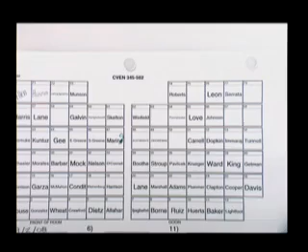You really don't? Okay, well, Ruiz, if you would please, just go fight him for the seat that you signed up for. Why don't you go ahead and move someplace anyway so I can. You're welcome to sit anywhere somebody hasn't already decided they'd like to sit. And your name is? Getman. And you weren't here last week? I was here. I just came in late. David did this. Okay. All right. It's going to be a fun semester, I can already tell. Let me assign. Here we go. Get one.

Well, the only reason I called on Ruiz is because he was yapping his mouth when I was trying to begin class. And so I was going to ask you what the answer to the problem was, but it turned out you were. Never mind. Never mind. All right. What do we got started on? What did I do?

There we go. We got started on an introduction to the class. We got started on tributary loads for, I don't remember. What were the tributary loads for? I'll ask her in the back. That's the new lady. Vitito. No, Vitito. Well, no, you just came, didn't you? So it's not fair just to pick on you just because you're trying to get a date with the guy next to you there. Alan, were you here last time? No, you weren't here either. Hunter, were you here? No. All right. Why did we do tributary loads?

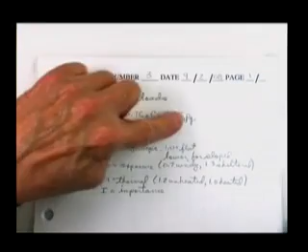Same thing works on page 63. They have an equation for snow loads. Where does the 7/10 come from? $250,000 worth of research, probably up around the north. Let's make them pay for it. We don't have any snow. Times C sub S, C sub E, C sub T, importance, and P on the ground. So you go find out basically in your area, with a map like you saw for the wind, what the basic loading on the ground is. Probably not too hard to research it out. Probably it looks something like this, my guess.

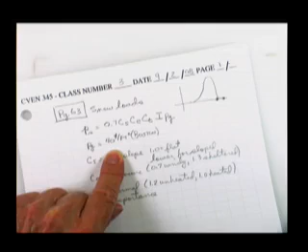Every now and then they do find 80 pounds a square foot in Boston, but not enough to really be able to design for it. So they went ahead and picked 40 pounds a square foot in Boston. And that number's in the book. That's the only reason that I used it. Here, I'm sure it's 0. And then depending on the slope of the roof, if it's flat, it's a 1, and it goes lower as the roof slopes, as you might imagine. The snow slides off.

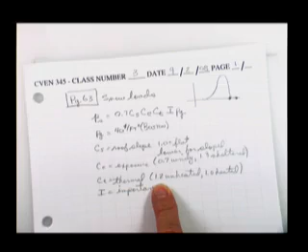An exposure factor. If you're behind a bunch of buildings, then when the wind blows, it probably won't settle on your roof. 7/10 if it's windy, 1.3 if it's sheltered. If there's a heated building, you get a factor, and you don't copy these down. For heaven's sakes, you can, I guess, but it's on page 63. 1.0 if it's heated, so they figure most of the buildings will be heated, and if yours is going to be a warehouse and nobody's going to be in there, they're going to make you bump up your loads by 20%, and then a factor based on importance.

So there's some engineering stuff that we do like that, that feels like you're just pulling numbers out of tables. You understand where they came from, but that's about the best we can do to give you a design for snow load or a wind load. Now, a lot of this stuff in here, in chapter 4 starting, is stuff that, for heaven's sakes, you know how to do. And chapter 3.

And I wouldn't know this except I just finished teaching half you guys statics, and I know that you know how to turn a uniform load, at least I certainly hope so, into an equivalent concentrated load. And for instance, when you see a 345 book that's got this in it, here's how you take a force and break it up into 2 components, I'm thinking that he must think that you haven't had statics yet, because I know you have. So a lot of this stuff I'll just mention very briefly, but we're not going to do a lot of this. We're going to hit this in a hurry.

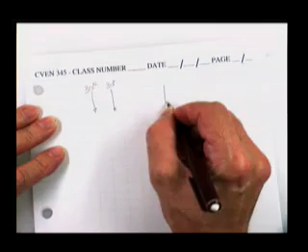If I've got a truck and it's got a 30 kip wheel loading and a 30 kip wheel loading and a 50 kip wheel loading, and these dimensions are 8 feet and 30 feet, I don't think you should have any problem turning that into a single equivalent concentrated load. Now, those loadings would not produce the same bending moment in a beam as would their static equivalent load.

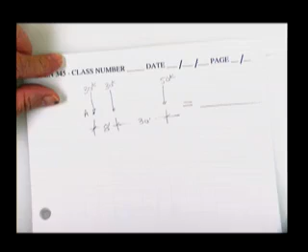But you get this equivalent load, for instance, to solve for reactions. You'll also find out where this load is located, so you can find out where to put these wheels to get the maximum bending moment in a beam. You'll use it for things like that. You call that point A. Those wheels have a tendency to roll about a point of your choice.

And when you get through telling me that all of those could be replaced by a single load, 50, 6, 7, 8, 9, 10, 11, 110 kips, I would insist that the tendency to roll of the original set of wheels about a point of your choice should be the same for your equivalent load as for your original loads.

So you would say that the sum of the moments about A is equal to minus 30 times 0 minus 30 times 8. That's a sign convention of your choice. Most people use a right-hand tendency to roll as a positive number. Minus 50 kips times 38 feet

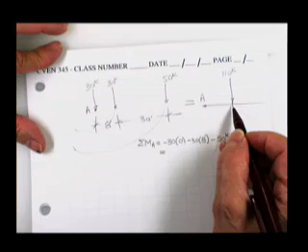has to equal the same when you lie about your loads to make your life easier, or to find out where to put these wheels, or for whatever purpose, should equal minus 110 kips times where you intend to replace the loads as an equivalent concentrated load. And then you solve for X.

And if you're already getting bored, that's good. I'm bored too. That's old stuff.

Resultant of a distributed load. Probably in 210 you learned how to take some weird looking load that nobody had ever seen before. Y is equal to cosine X log of X divided by something, and take it into little bitty slices and find out the height and multiply X times dx and stuff like that.

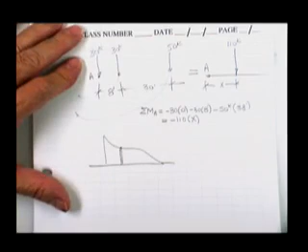The loads that we normally use don't have those kind of looks to them, but it would certainly be necessary for you to be able to take something like that and tell me how much load is underneath it, and tell me where you could replace it with an equivalent concentrated load. If this was 20 kips per foot, and that were 30 kips per foot, and this were 5 feet, 10 feet, 20 feet,

then you should be able to break it down into little pieces that you fully understand. A triangle with a height of 10. You're going to take care of the 20 down here. And where he lives, his centroid. And another area, 20 times 10. And where he lives. And this area and his third point. And you should be able to replace that with a single equivalent concentrated load.

Probably if you're really solving for reactions on a beam, it would not be worthwhile to turn that into an equivalent concentrated load and then put it on the beam to find the reactions. It would make a lot more sense just to go ahead and replace them individually by what they're equivalent to. Here's the first load.

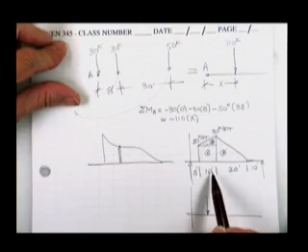It's 20 kips per foot tall and 10 feet wide, so the area under that curve is 200 kips of load. Here's 20 kips per foot high times 10 feet wide. Feet cancels feet, leaves you with kips. It's 200 kips. And from the left-hand reaction, you'd put it where? Let's just pick somebody at random here. Getman.

All right. No, that's okay. Well, now one thing, don't write too much. I don't want you to write none if you need to, but these will be posted. So sketch down enough so you know where I'm at, but I know some students spend all of their processing power getting the figures and the equations and everything right, and then they go home and say, well, what the devil did he say?

So I'm really asking you for this uniform load right here on this beam, where would you put that 200 kips? It's 20 by 10, so that's why we put 200 kips. Where would you put it? It would be 10 feet from the front. That is correct, and the reason he says that is because it's 5 feet to the edge and another 5 feet to the centroid of the shape you're discussing, and so that's 10 feet.

Then this one you broke up into a triangle. You could, if you would rather, break those up into two triangles. In other words, a triangle on the bottom and a triangle on the top. I would not break it up into this shape here because I don't know where the centroid of that is. I can't just go stick it on the beam.

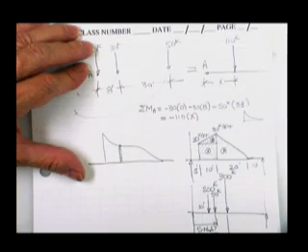Here would be your reaction at A. Here would be your reaction at B. I probably wouldn't even bother showing you that. Goodness, hope you can do that.

Do want to emphasize, once we start drawing shear and moment diagrams, do not draw a shear and moment diagram for this case. This is a total lie. The moments in this case here will be much greater than the moments with this load all nicely spread out. That's why if you ever see somebody walking across a very slender piece of wood and it starts really bending, you'll see them naturally lay down and crawl across the thing. It's easier on the board.

Yes, sir. The bottom half of your... oh, it's off the thing. Thank you, the word is 'hey'. Okay? If you can't see it, just say hey. No sense in raising your hand or anything else. Just, I don't know immediately. Hey, what? Oh yeah, I know what. Put it so you can see it.

All right, so that covers through page 79, page 80.

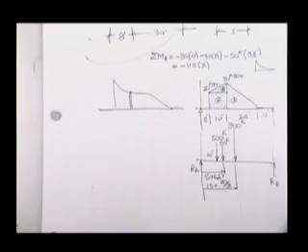Sometimes you will have rather complex distributions. Wind loadings on the sides of buildings, a lot of times they'll have a number, and then they'll have a number, and another number, and it's not linear, it's not parabolic, it's not anything. It's just, you remember these numbers, they came off of the factors with an H on them for the height.

And they just draw straight lines in there, and they just go ahead and assume that probably you could just go ahead and take the average and stick it in the middle. It wouldn't be that far off. If you want to, you could go ahead and break it up into a triangle and put them at the third points, but we probably don't know the numbers that close anyway, and these things are usually pretty close together.

Supports, he shows you all the supports. By now you surely know all the supports, pins, rollers, stuff like that. You probably hadn't had a lot of practice with structures that have pins inside of the structure. So we could fiddle with those and you would probably find something reasonably new.

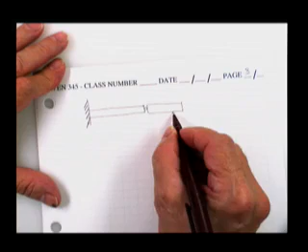Let's say, for example, I had a cantilever beam, and it was pinned to another beam, and that beam had a support underneath it. I'd say you had a triangular load on this beam, 12 feet across, or 12 meters across.

And the load is 100 kilonewtons per meter. The dimension to this is 8 meters and 3 meters, plus a concentrated load on the end of 500 kilonewtons, and a concentrated moment. That concentrated moment probably came from a beam that was sitting like this.

You see it's a wide flange. It actually goes down the road to the next one of these, and there's something sticking out of it that twisted it. Or it could be that at that point on the figure, I've got an electric motor.

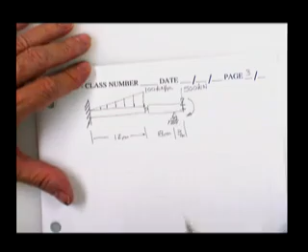Once that motor accelerates, it causes a twisting moment or a torque, and that moment is equal to 1,000 kilonewton meters. And I would like to solve for all the reactions on that structure.

Now that structure is statically determinate, and there are pages that attempt to tell you how to calculate how many reactions there are, if it's statically determinate, unstable, or more highly constrained such that it's called statically indeterminate. The truth is, I think you do just about as well, and make fewer mistakes, rather than counting the number of reactions and special conditions, if you just kind of take it apart in your head.

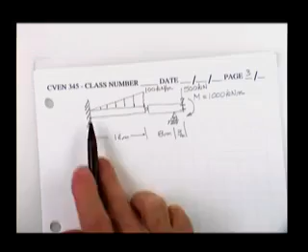This is a cantilever beam. You've seen them forever. Every time something's stuck out of a building and jammed into the bricks, it's a cantilever beam. It has the ability to resist that kind of a load, that kind of a load, and that kind of a load. It's just like a diving board.

And if you take the whole structure apart, you've seen something that's stuck out of the wall like that, and it stands up just fine. It doesn't have a tendency to go anywhere.

Now then, to that, I'm going to bring in a piece of steel, BCD. And if you just let it sit in the air like that, with only one support, you know what would happen. The same thing would happen with this pencil. Every time you do it, it's not stable.

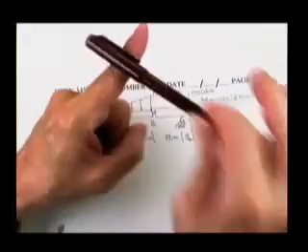It falls off. So what we'll do is pin it to something that is already stable, and we proved it's stable, and then that ought to sit still. It's just like a beam with a reaction at B and a reaction at C.

And you could add as many more of those as you want, and sometimes they do - sometimes there are several of them in a row. Yes, sir, at the end of that second beam. All right, do you mean this thing?

It's like a wide flange. They look like this. They're used to carry loads from this piece of paper to the piece of paper that's behind this one, about 20 meters away. And then every 20 meters there's another one of these things stuck out of the wall, and they connect them together so that you can walk on the top of them. In other words, the floor would go on top of this. So you're saying that goes into - this goes into the board. That's correct.

All right, how do you solve such a problem? Thoughts? You can start by calculating the concentrated load for that triangular load. You could - in other words, before we go very far, you're going to have to replace the uniform load with an equivalent concentrated load. Otherwise, when you sum moments, you're going to have every grain of sand times its own personal moment arm, and you're going to be here for years. So I agree, take it apart is what I was thinking for first.

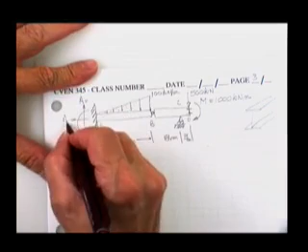And actually, everything that you said is right, has to all be done. First thing I think of is draw free bodies. And as you draw these free bodies, replacing these loads with equivalent loads makes a lot of sense. So the first thing is, this is a vertical, this is a horizontal, this is the moment about point A. Point B, I won't show you any forces because they're inside this structure. And then I would show you a reaction at C - it would be a vertical reaction only, no horizontal reaction, because it's a roller, which can't provide a horizontal force. And I'd look at it and see if I could solve for it directly right now, immediately.

1, 2, 3 - we have 4 unknowns. We have how many equations of statics? You have 3 equations of statics. So you're destined not to get an answer for all of them. Every now and then you can kind of cheat and one of the answers will come out, but even though you get it, you've used up one of your equations to solve for one unknown, and you still have more unknowns than you have equations. So probably the smart thing to do is go ahead and start breaking it up.

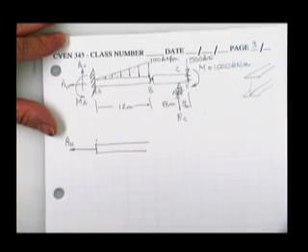First off, I'm not going to show the wall, because that was a little bit of cheating to call this a free body with a wall on there, but I did show you the forces. I'd show you a horizontal, which I do not guarantee the direction - I have no idea, but I have to put an arrowhead on it, and I have to put a name on it so I can put it in the equations. I get students who say, well, why didn't you draw a free body? I didn't know which way to put the forces because I thought they might be wrong, and then I would have a wrong answer. It's not going to happen.

If you guess this arrowhead wrong, your equations will say minus - that'll tell you the arrowhead goes on the other end. Then you have an A vertical - this is a guessed direction. And then you have a moment at A, and this is also a guessed direction. And then here we have a pin. In general, a pin can provide a horizontal force, and it can provide a vertical force.

I'm going to assume that the vertical force goes down on this member AB, and I'll call it B vertical. And I'll assume this goes to the right, B horizontal.

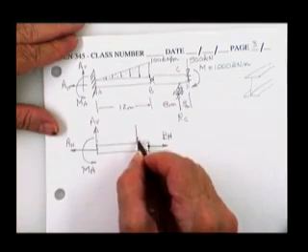Again, to make my life easy, I'll follow the suggestion that I replace all of those bags of sand with a single concentrated load at the centroid of the figure. You'll notice I picked a better dimension on this one, 12 meters. That means this is 8 meters and 4 meters. The amount of load is 100 times 12, that's 1,200. Half of it's missing, 600 kilonewtons worth of sand.

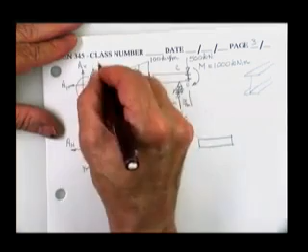Then we draw a free body for the other piece. Incidentally, by drawing this free body, you just added 3 equations to your set of equations. Sadly, you also added 2 unknowns that weren't on the first free body. Let's call this free body number 1. Let's call this free body number 2.

Let me assure you, if you don't number the free bodies, and if you don't write down, hey, boss, I'm using free body 8, equation number 13 is this — if you don't do it in a logical order like that, he'll have no way of checking your work.

All I can do when I give you a problem like this on an exam, if you don't show me which equation you're using and which free body you're using, I just look in the box. If the answer is right, I say great — I love those, they're easy to grade. And if it's wrong, it is wrong. That's a binary situation: yes, no, minus nothing, minus 20.

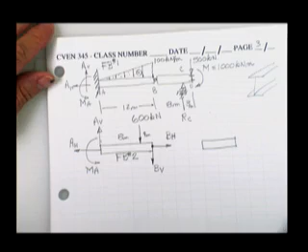When you come in and say, look at this, I have 4 pages of work, I only have 1 mistake — yeah, but it's too late now. Tell me what you did.

B horizontal is assumed to pull on member AB. Which way must I show it on the other member? The other way? Well, I'm not sure I understand.

I'm going to do that, but then I need an explanation for it from you. When you drew another free body here, now you're telling me the arrowheads should oppose. In other words, if this one's shown to the right, guessed to the right on this, then the guess is to the left on this. But when you showed this one up, when you redrew the free body, you still showed it up. So I don't understand — here's two free bodies, up and up; here's two free bodies, right and left. Something's going on here. What?

Depends on the other. True, that's how come they have to be opposing each other. But when you drew this free body, how come this one was up? Why didn't you show that one down?

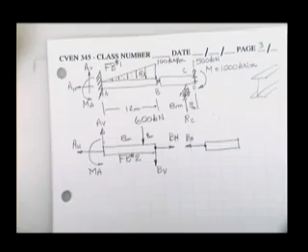We just redrew it — exactly. It's a Xerox. In other words, when you showed me this piece of steel right here, on piece of steel AB, you guessed this reaction was up. All you did was Xerox it, just redrew it. It's the same piece of steel, these are the same forces. So they go the same way because they're the same piece of steel.

On this one, on the other hand, when you guessed B horizontal in tension on the right end of member AB, you said it is pulling. When you moved to the other piece of steel — and there's the trigger — you have to show it the other way. And if you forget to do that, you'll get all kinds of wrong answers.

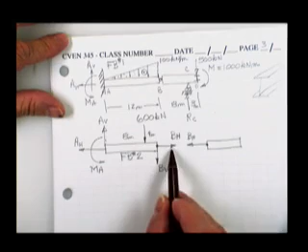If you ever find out this arrowhead is wrong in one of your equations, you must immediately go change this other arrowhead because it's wrong also.

Since you guessed that someone has put their feet down on the end of this member, you have to show me what that member is doing to your feet — namely pushing up on your feet, B vertical.

Now then, this thing right here must be shown true or false — in other words, must be shown appropriate or not. Yes, they are. Why must this be shown up? Because on this free body, you guessed that force up on this piece of steel. This is that same piece of steel, and therefore the force is again up on that piece of steel.

Then we replace any uniform loads or distributed loads with an equivalent concentrated load. In this case, we don't have any. 1,500 and 1,000.

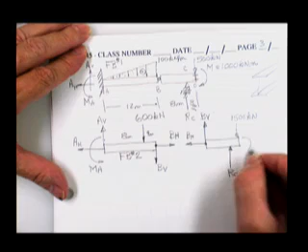Question? 500. I don't know why. I just wanted more load. Thank you.

Because it says 1,500. Okay? And if you see that, even if it doesn't matter, if you say, okay, well, I know what he means, holler. Because the guy next to you won't, and he'll call me at about 12 o'clock at night trying to figure out why that thing says 1,500.

So now, that you have there really doesn't change your analysis. Oh, well, no, it really did. I was just trying to show you something that caused this moment. But let me take it off because it's obviously confusing. I was just trying to show you how you get such a thing. Probably because some other piece of steel frames in from an angle which is being twisted and puts a twist, a torque, a moment on the end of that member.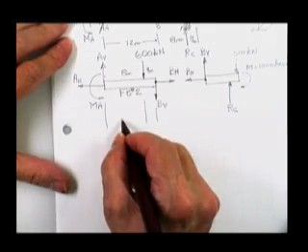All right, so now we have our free bodies. As soon as they have dimensions, I guess they're free bodies. 8 meters. The dimensions are already up at the top, and the dimensions up at the top, 8 meters and 3 meters.

Now we have free body 1, free body 2, free body 3. I really do insist you tell me what free body you have decided to go tinker with and write down, this is equation 1 using that free body. Which free body would you like to start with?

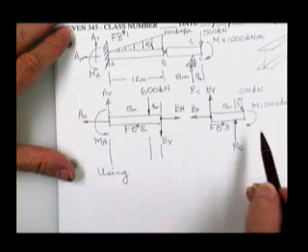3. All right, let me see why. First off, I know you didn't start with 1, because we already looked at 1 and had too many unknowns to get started. Looking at free body 2, you have 1, 2, 3, 4, forget that, 5 unknowns. Over here you have 1, 2, 3 unknowns, so that's a good bet. Therefore, it's probably going to be able to get started on free body number 3.

Using free body number 3, my first equation reads... what's the most powerful equation you have? Sum of the moments. Pick a good point to sum moments about, and you'll wipe out all kinds of unknowns. Sum of the moments about B is the one that comes to mind first. The truth is, were you to sum moments about C, B horizontal would have no moment arm, and the reaction at C would have no moment arm, so that also would be acceptable.

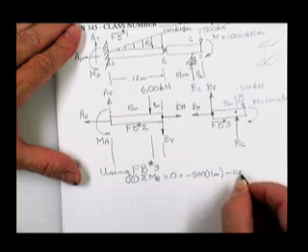Were you to put a moment arm on top of a thing that's already a moment, you'd have a kilonewton meter squared. Well, nobody knows what a kilonewton meter squared even is. It is a moment. It's ready to go in this equation. Plus the reaction at C times its moment arm, 8 meters. If you don't see why I'm doing those pluses and those minuses, you need to go practice.

And therefore, somebody with a calculator, give me a hand here. Reaction at C is equal to... 500? You're kidding, right on the money? No? What'd you get? We got 6,500 over 8. I don't know the calculator. Okay, 812.5, all right. Maybe I just misheard.

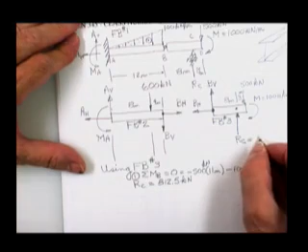Kilonewtons, because getting something even when you put so many weird numbers in there like that is pretty low probability. As soon as you get an answer, I'd recommend you go put it in there. If it came out with a minus sign in front of it, I would expect you to immediately look around, make sure nobody's watching, erase that arrowhead and put it on the correct end, erase that arrowhead and put it on the correct end, and then rewrite your equation right quick. There'll just be a few minuses that change to plus or vice versa. No one will ever know you're less than a perfect arrowhead guesser.

The real purpose, of course, is if you leave the arrowhead in that direction and write down a minus 812, they may notice the minus and they may not. And you may notice the minus and you may not next time you use it in an equation. The chances are pretty good that you'll miss the fact the arrowhead is the other way. It came out positive, therefore we leave the arrowhead alone. 812.5 kilonewtons. List it twice. Anytime you get an answer, there ought to be 2 free bodies on which that answer can be listed. There ought to also be 2 arrowheads that need to be left alone or need to be changed.

Now, I think once you get that free body going, you ought to just keep on beating it as long as it'll cough up more answers. When it won't cough up any more answers, well, then you move on to another free body. Equation 2. Marino, give me another equation that will give me something in free body number 3.

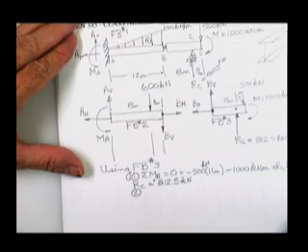That's correct. And the way he knows that is he looks across here and says, I know that up and down, I know that up and down, I don't know this up and down. He puts one finger out, and then he says, okay, there's only one unknown in the sum of the forces vertical equation. I'll leave it under, using free body number 3. Sum of the forces in the vertical direction is equal to 0, is equal to plus B vertical plus the reaction at C, which is 812.5 minus 500.

And that's all of them, and you solve for B vertical, being careful with the sign. If you leave B vertical on this side of the equation, then the 812 comes over as a minus, the 500 comes over as a plus. That means I'm going to get a minus for an answer. What'd you get? 312.5, thank you, kilonewtons.

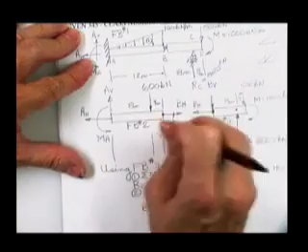I would immediately, personally, it's up to you, I wouldn't even write an answer on it. I'd go find one arrowhead and I would change it. I never write in ink, I learned that many years ago, and I change it twice. I'll put the arrowhead on that end. A minus with the arrowhead left alone is just as accurate, just as true, but it's just not as noticeable. Then I would say sum forces vertical is equal to so-and-so is equal to minus B vertical, and then I would change this minus to a plus. I think that's all I need to do. B vertical moves over as a plus. It's equal to a plus minus plus 312.

Now I'll go list the answer on the free body: 312.5 kilonewtons. And list it twice, 312.5 kilonewtons.

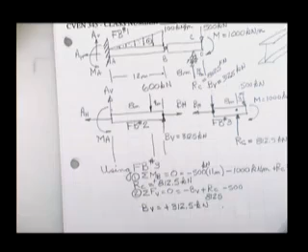Now the only reason I do this is because I don't think there's any reason in the world for me to show you how to get reactions on a simply supported beam, or on a simply supported beam with overhang. But when they get kind of strange like this, then you probably haven't practiced with these and may be less familiar with them. I might say we might work one of these someday. Here's the support, and here's the support. Well, one of those is relatively unusual. That's not the stock in trade when you took statics or even when you took 305.

Finishing this one would say equation 3, but it's worked the same way exactly. If you see a pin, you put in a force, and you put in a force, and you know they may be wrong. And here you see a roller which goes that way, so you put in a force right back there. Those are your reactions. You have the same equations of statics as you had always, and you solve for the forces inside there.

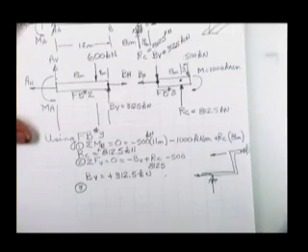Sometimes there are really too many forces. For instance, I can easily make this what they call statically indeterminate by tying it down too many times. And usually you can tell how many degrees indeterminate something is. First thing, if you worry about whether it's indeterminate, you just start taking stuff loose. Once it falls down, you say, whoops, that was too many, and you put one back on it.

And after you put that one back on it and you look around and the boss says, oh well, there's another one because that's not a roller there, that's a pin, then you know it is 1 degree statically indeterminate. Every time you take something that's nice and stable and sits still and is statically determinate, and add a constraint to it, don't let it move where it might like to, you're adding a degree of indeterminacy to the structure.

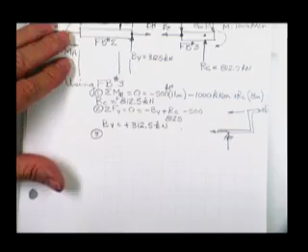Equation 3 would say sum of forces horizontal is equal to 0, is equal to minus B horizontal. And that means B horizontal is 0, and it's in the wrong direction, but it's so tiny I don't care. It's equal to 0. It's equal to 0. Now that I'm ready to move to another free body and start picking off things.

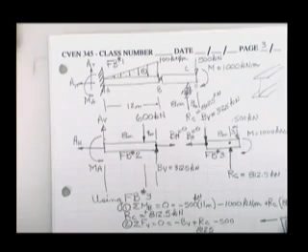Hunter, what free body would you go to next? To, I can't think of anything funny to say, to solve for some unknowns. Well, a fair question, I guess. Anything I don't know would be really what I'm looking for. So number 2 would be fine.

I believe that also you could go to this one here and you could also get answers out of this one now. And half of you will go here and half of you will go here, and that's perfectly okay. It wouldn't make any difference which one you went to, as long as you tell me where you're going. I'm using free body number 2.

And I'll write down the equations that I would use in order, and then I'll let you do the work on your own. My 4th equation would be, almost always the thing I'll do first is sum moments. It's the most powerful equation I've got. I probably will pick point A. Maybe I will write that equation down just to make sure everybody sees it.

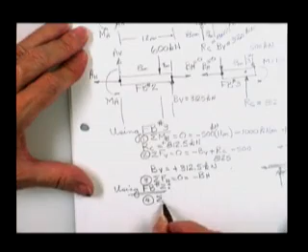If you sum moments about point A, the equation reads sum of the moments about point A is equal to 0. Why? Because it's what? Because it is statics, that's right, because it's supposed to sit still. It will not be 0 on an airplane. It'll be a propeller and it'll be moving like crazy. But in this class, all our things sit still. Therefore, the sum of the moments is equal to mass times acceleration. There's no acceleration. It's equal to 0.

Is equal to plus m sub a. This is still using right-hand rule for the direction. And I've guessed it's this direction, so I'm going to call it a plus. Minus 600 kilonewtons times his moment arm of 8 meters. Plus 312.5 kilonewtons times his moment arm, 12 meters.

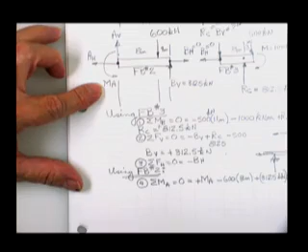I don't remember in our homework, you've already worked a lot of homework, has he got any meters in there, or does he just do everything in feet? Yes, some meters? All right, so we'll try and mix them up also.

There's one equation and one unknown. And so you'll solve for m sub a. Your next equation would say sum of the forces vertical is equal to 0. And your last equation would say sum of the forces horizontal is equal to 0. And solve for all the unknowns.

Now that was one of the problems you were having on some of the homework we had this time. I don't remember which one it was. But you had to break, I guess it was that piston rod thing. You had to draw a free body of the whole thing. And you had to put forces on it. Many of you had the piston in there, and you had,

Maybe so, thank you. Good point. Glad you told me, because I'd have sat there and worked the whole problem. All of your classmates are looking at you ugly now. Come on, don't tell him when he goes off on a tangent. Let him go. Good point.

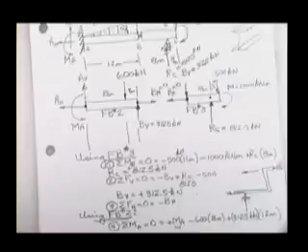You do need to be able to break these things into pieces a lot of times to get enough equations to solve for them. All right. And he talks about free body diagrams in the text. It gives you your equations of equilibrium. This would make a good 221 text. Got some good examples. Got one that looks very similar to the one you and I just did on page 95.

Now, let me show you some beams. Here's a beam, and here's the load on it. What do you have to say about that beam? It's floating. No, it's not. There you go. Now then, let's see if you think it's floating. No, you don't think it's floating. It is not stable. And here you are, right there.

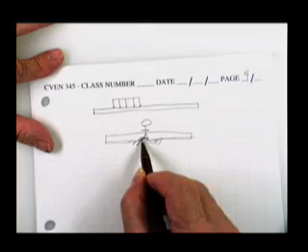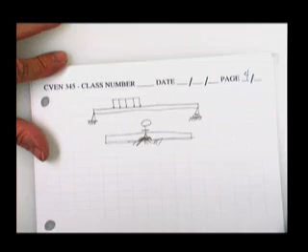Therefore, you need to put some supports on it. So let's put a pin. Well, that's better than it was, but now it still rotates clockwise. And so let's put a roller. And you've seen hundreds of those in your problems, and you've seen hundreds of those every time you went under a bridge. And you know it is statically stable, and you can solve for the reactions from statics.

Yes, sir. I have a question. If beams are really good in compression, and I guess tension also, and not so good in moment? No, let me revise those words a little bit, okay?

Beams are extremely strong in compression, because if you have a compressive force on them, every little fiber takes an equal amount of load or stress. On the other hand, when you bend something with a bending moment, the top goes into compression, or vice versa. The bottom goes into tension.

This guy here doesn't know what to do. He looks at the guy at the top, he tells me I should go compression. But if I look down here, the guy says I should go into tension. So the stresses are distributed like that. You see all these fibers in here that aren't really working their little hearts out for you? So in other words, beams or pieces of steel are extremely strong in compression, and it's a lot harder if you bend them.

So if that's the case, why do people usually put a support on one end and a roller on the other? Because that would allow the beam to kind of deform in that sort of way. Right. So is your suggestion that we put a pin on both ends? Yeah, because then when it tries to deform, it would help support the beam slightly.

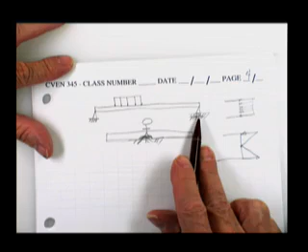The problem is these things. Once this beam deflects, this piece of steel is going to get a little shorter. It's going to go a little longer route, and it's going to put tremendous horizontal loads into these pin connections, and we can't stand that. But a worse thing than that is, once this thing gets hot by 100 degrees, it is going to get 0.06 inches longer. There's hardly anything you could build that's going to stop it.

You could say, well, I'll put it between two solid concrete walls. When you come back tomorrow, when it's cool again, you'll find a little H-shaped hole punched in the wall. It's just tough to stop them from getting longer. And therefore, due to temperature loads, it'll tear this thing out.

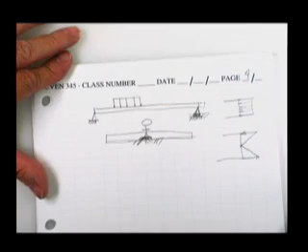You're probably too young to remember the Hyatt Regency collapse, which had a walkway collapse. That was the second failure in that building. That one cost them something like a couple of hundred million dollars to pay for all the dead people. But about 2 months before that, they had a roof that was built like you say. They jammed both ends into the wall, and they had steel rebars stuck in the wall.

Had they been able to get the roof on it and heat it up, they'd probably have been okay. But the coldest night on record came through and the roof was still not on it. It was about half on, so there was cold air all around it. This thing got shorter by about half an inch. It just tore it right out of the wall and dropped one end into the mezzanine floor. So that's not a good idea.

Now, the other thing I've been asked before is, why don't we just put a roller on both ends? Then you won't have to worry about thermal stresses at all. Somebody will steal it. So put a pin, put a roller. All right, now then.

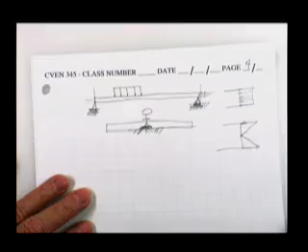Let me put another support, because what I find is that this dimension of 100 or 60 meters is doable, but the stresses in the beam are relatively high unless I make it a very, very deep beam. And I prefer not to have to spend that much for the beam. Let me show you the deflected shape first. This is the deflected shape. Should be symmetric, of course. No, it shouldn't be symmetric because the load is to the left. So my pencil knew what I was doing.

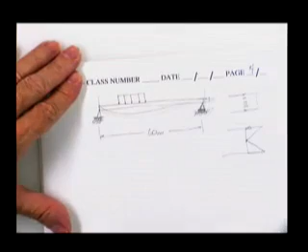It's just I didn't. So I come in, because this deflection is large, and even then I have to use such an expensive beam that the architect has a fit. He says, well, I wanted 180 feet of clearance in there, but if you really need a $500,000 girder to do the job, I think I'll go ahead and accept a column in the middle. I say, good idea. So we put another support in the middle or someplace.

The beam now deflects, but it now must go back through point 0 deflection. And that means this side would actually rise up slightly. Of course, that's unbelievably exaggerated. If a beam ever deflected that much while you were on it, you would immediately leave. But it can easily be like half an inch.

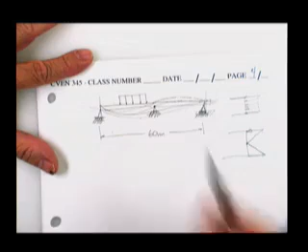But you have now made this structure what we call statically indeterminate, because you've added a support that you didn't need from statics in order to get answers. And you did it for a purpose. The purpose you did it for was to reduce the span from 60 to 30 meters, and now the beam might well only have to weigh maybe a third as much as it used to.

I believe the equation for max moment on a uniformly loaded beam is WL squared over 8 or something like that. That L squared, that's a powerful factor in calculating moments in a beam. And every time you do so, you restrain it again. And let me quit restraining that one and go ahead and restrain another one here.

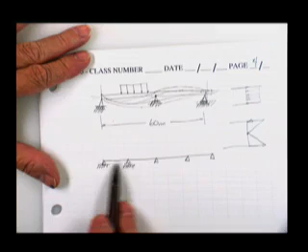You only needed one on each end, or you could have just had these two. That would have worked. You and I just got through working with a beam that looked very similar to that. Had a support and a support, and there was a piece hanging out. But if you assume that the original structure was end to end, and you put in 3 additional supports, that is 3 degrees of statical indeterminacy you've added to the beam.

Now, if you can't get enough equations of statics to do the job, you're going to have to get some kind of equation from someplace else. You can look in a book, you can pray, you can do whatever you want to do, but you need another equation. Well, the equation is what they call a compatibility equation. Used to be this beam was permitted to deflect as it desired. You now make it compatible with this new reaction, namely it has no deflection at that point.

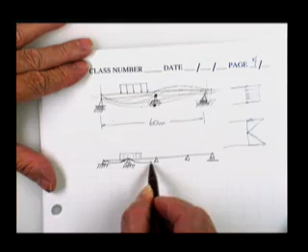In this one, probably the deflection would be kind of down, come in, it might have a little bit of rotation here, but the rotation is not prevented, and then it would be down, and then it'll go up, and then it'll go down, and then it'll go up. You can get a piece of a coat hanger, and you can support it at these points, and you can push on it with your hand. You can see how it deflects. That's pretty much how the beam will deflect.

If this right here turned out to be an inch, more than likely this would turn out a 1/4 inch, and more than likely this one would turn out to be 0.05 inches. It quickly damps out, but that's the general shape of the beam. Let's say you had a structure that looks like this.

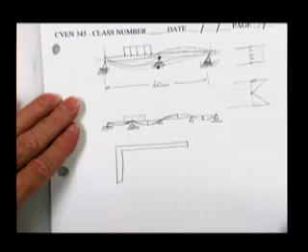First off, if you support it like this, and you ought to start getting a feel for this. I mean, you really should. Is it okay? Is it going to stand there? Yeah, it is. It's just like a diving board that someone bent. And you can stand on it any place and, as long as you don't overstress it and it doesn't fail, it will be fine.

And so if you decide to add any new supports for any purpose whatsoever, you are adding degrees of indeterminacy to the structure. So if I do this to the structure, how many degrees indeterminate is it? Well, I heard every number from 1 to 3. Would someone like to put out a 4? No? Okay. It is 1 degree indeterminate, 2 degrees indeterminate, 3 degrees indeterminate.

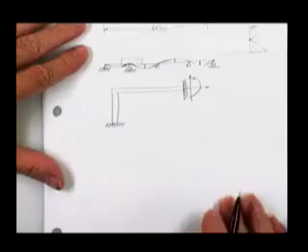The real way they analyze that structure, or at least one way they do, is to say, that's nonsense. I'm going to have the structure all tied down like that. There's the original structure, and they'll put the original loads on it. Perhaps the original load was nothing but that, and maybe also a uniform load. And they will say, this is what I want.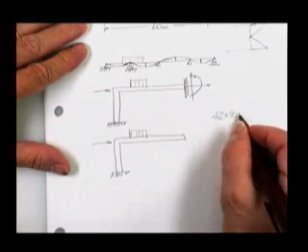And the guy who's designing it in steel says, I don't think that's really what you want. This is going to be a 42 by 900 wide flange. What is a 42 by 900 wide flange? Should have learned that in 305.

Who giggled? He's up. Everybody point at him. Boy, what an honest guy. He raises his own hand. Makes me feel bad. Should have learned that in 305. As again, I know half of you know and just won't volunteer, so I'll just have to go find some poor sucker and pick somebody at random. Getman.

It's a wide flange that's 42 by 900. It's 42 inches deep, approximately. The 42 series could range anywhere from 40 to 45 inches deep. They all started out 42, but as they roll different thicknesses, they roll different flange thicknesses and stuff. I don't even know if they make them in the 42s or not. Most books don't go that high.

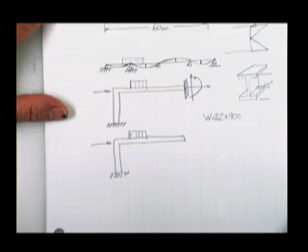They then find out how much that structure moves to the right and left. That's undesired. They will end up going and getting a hydraulic jack and pushing it back so that this deformation disappears. It bends down. This is delta. Let's call this ABC. This is the deflection at B in the horizontal direction. Here is some undesired deflection at B in the vertical direction. And they find out how much rotation, theta at B, and they make it disappear.

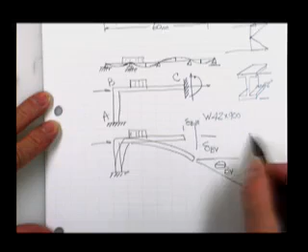They very carefully push on it this way, and roll it like that. Actually, each of these interacts with each other. As you push it up, you get rid of some of the theta. As you push it up, you cause some of this to go away. So it's a very careful mix of those three numbers, which will make this structure bend like this. This probably bends down because of that load.

How do you want me to deflect the structure right here? What do you want me to do with it? None at all. I want to bring it straight into the wall, because that's what a fix is. So it would look like that. Let me draw you the centerline distortions. Probably looks like that. Then this probably kicks out and it comes back in straight up and down.

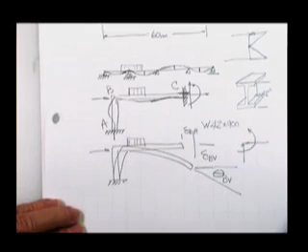But the main thing this chapter wants you to do is find out how many degrees indeterminate something is, so you have a feel for how many equations you'll need to generate: consistent distortion equations, compatibility equations, to complement your statics equations to get an answer.

So I have something that looks like this, and it has a pin, and it looks like that, and it has a pin, and it looks like that. And it's supported here, and it is supported here. Will it stand up?

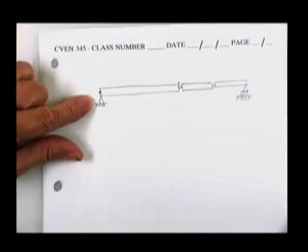You see how this thing right here is just going to roll down, not have any moment at this point. This piece is going to fall down with it, and then this piece here is going to roll over. It's not stable. It was stable before you put those pins in there. How many pins did you put in there? Two. You're going to have to come up with two more supports to replace the fact that you destroyed the moment at these two places in what used to be a statically determinate beam.

So let me put one here. Now then I see that this left-hand beam is good and solid. I can grab on it anywhere and I can move it around. I can pull up on it to tie off my helium balloon if I want to. If you say, well, no, you can't, because these little wheels will lift off — this is a convenience only. It's just a quick way to draw a roller support.

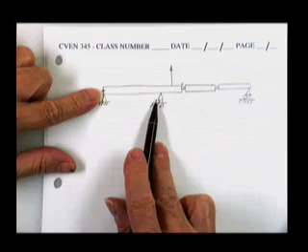If you have a downward pressure on this support, what they really do is take like a concrete beam, and here is the big old chunk of concrete on which it sits, and they'll put a piece of neoprene in there. It doesn't even have any rollers. When the concrete beam wants to get a little longer, the piece of neoprene just kind of shears with the beam such that there's no horizontal force in there.

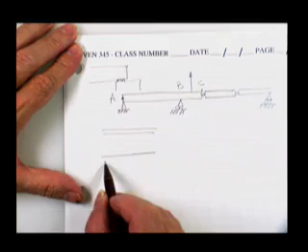If you're going to really have tension on the beam, then I'll have to tie it down. Probably the way I'd tie it down — this is the beam A, B, C. At point B, I'd come in here. Here's the wide flange, as seen from the side. I'd go ahead and cut this out.

Cut out the flange, and then I would put a pin. If I can draw it in 3 dimensions, I'll try. I'll put a pin like that to permit the thing to roll left and right. And then on this one right here, I'll put a plate behind it. I'll drill a hole and put a bolt through there, or a pin. I'll drill a hole through here and bolt it to the web. This piece right here will be welded to a plate, and that plate will sit on top of the piece of concrete.

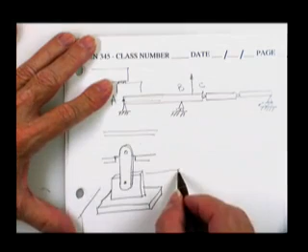Well, that didn't work out well - that's a contracting error. We will put bolts down into the concrete, and we'll put hooks on the end of them so that the tension can be accepted into the concrete and then all the way down to the ground. So here's your beam right here. I'll make that thing be able to take tension. This is just a quick way to show what took 3 minutes to draw here.

But I still have this problem. This is a simply supported beam. On the left end, it's supported by a good support - come in here and pull up and down, this beam won't move. But there was a simply supported beam, and you added a pin in the middle, and I can't live with that. You can't just come in there and put a pin in my beams, and therefore I need another support.

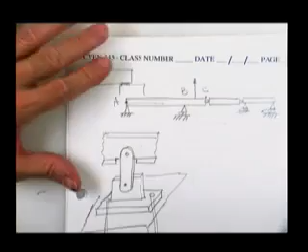Probably you get away with putting another one here. This is the real problem - the real problem with using the equations. The equations count number of reactions, number of special conditions, number of this, number of that. But once you finish counting, you can still be in trouble. I mean, you guys very seldom build things like this. You usually build buildings or bridges, and you don't put pins in the middle, unless it looks something like this. In this case, that works.

That'll work right there by adding this to take care of the fact you took out that moment. You have a simply supported beam with a little cantilever piece to it, which is nice and stable. It can't roll left and right because it bumps into these pieces, and those horizontal loads go into this reaction. And this little piece here is supported on his left end like a simply supported beam, and this guy supports the right end, so that's okay.

If you were to take this and put it - let me see if this works. Sometimes... no, that would still work. It's all right if you put the support there. And the reason being this: you take a look at this and you say, I'm not sure I like this. This little piece might roll clockwise. The other piece can't roll clockwise because it bumps up against this pin, and this cantilever beam will take up and down load, so this piece won't move. And since this piece won't move, this pin won't move, and that piece is supported.

Every now and then you can get a combination of things put together where when you count reactions and count numbers of this, that, and the other, the pieces form a link and they can roll on you. That's why I think it's probably just about as good to look at it, see what you've done to it, and count, figure out whether or not it's going to sit still.

Yes, sir. So right now, this beam has no degrees of indeterminacy. It has no degrees of indeterminacy. What would happen if I were to add one more support? One degree? It's one degree statically indeterminate. That's correct.

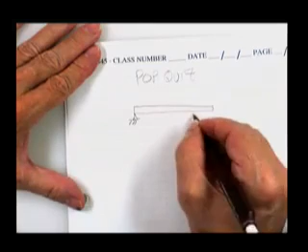Shouldn't take any more than a minute, and by my watch you got 2. Solve for the reactions at A and B. And if you say, well, my goodness, why didn't you just ask me to write down my name? Well, that's about all this is. Check and roll. Solve for the reactions.

If you didn't bring a calculator, I'm sure the guy next to you will lease one to you.